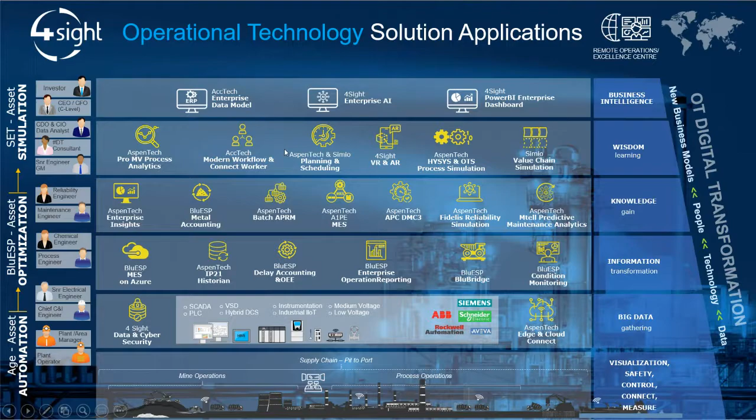So yeah, the digital twin concept is becoming quite a key theme today in what we have to do for our industrial clients. Maybe just a last word on BluESP before we start. So as I said, at BluESP we see ourselves as a very dynamic and agile company of multidisciplinary engineers. So we've got a bunch of chemical engineers, mechanical engineers, electronic engineers, and also data scientists that bring value to the client.

We really use technologies, we use AspenTech as a role model to basically understand what new intelligent technologies they bring to market, and how they bring, for example, AI, machine learning, deep learning into these disciplines of MES systems or advanced process control systems or multivariate analysis, and some of the things that we'll talk about, and you'll see a bit of that today. So we're working very, very closely with AspenTech on a lot of these things.

If you look at the offer set, we have tools in the design set here at the bottom, and really the key focus there is simulation, design, cost, and build associated with a new plant section. If I was going to build a new process of a plant right now, I want to do it the greenest, the most cost effective, and the most sustainable. And there's a whole set of tools that's basically focused on that.

And then the next thing is, once I build the plant, I want to operate that plant to its optimum point. So I want to basically transform that data, aggregate that data into a historian system, make the data available in EROs, so enterprise reporting, operational reporting, do mass balancing or metal accounting associated with that. Also use, for example, advanced process control in areas where there are very, very complex controls in plants. So those are some of the things that form part of the operate.

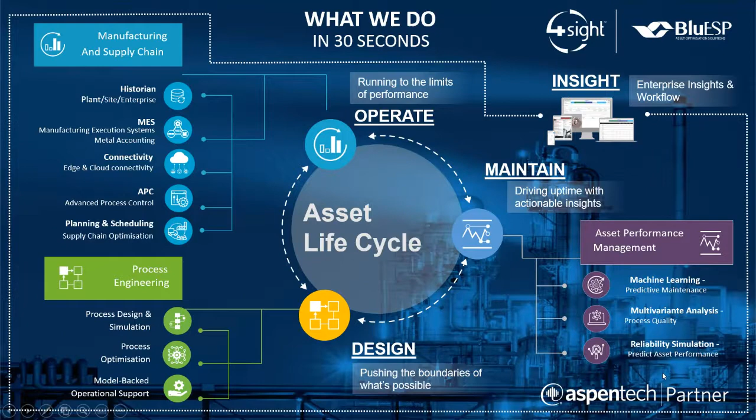We will be touching here on multivariate analysis, unlocking the potential in your plant.

To introduce us, I am Raisa Khan. I am an APM engineer at BluESP. I joined early this year and hit the ground running with predictive maintenance for a mining giant. I have previous experience in the steel industry and hold a chemical engineering degree from Stellenbosch University.

Next up, we have Laura. Laura has 20-plus years of experience in industrial maintenance and global field service across multiple industries. As a member of the AspenTech Asset Performance Management marketing team, she looks to use this background to communicate how the powerful solutions address the recurring frustrations of customers in the most value-added way. She holds a bachelor's in mechanical engineering from Virginia Tech and an MBA from Indiana University.

Next up, we have Kinesh. Kinesh holds a master's degree in mechanical engineering from the University of Pretoria, specializing in gas turbine aerodynamics. Kinesh joined the BluESP APM team in 2019 and has previous experience at Deloitte as a data analyst, as well as in the petrochemical industry as a design engineer. Since joining BluESP, Kinesh has been extensively involved in various predictive maintenance and multivariate analysis projects for the petrochemical, mining, and metals industries.

Process variability is another way to say you need process stability. So when there are efforts to create this stability, you can't control what you can't observe. And issues that creep into something like production quality may be due to things that aren't associated with quality or with your production stability, or even the item in question, because they're not currently monitored. And back to the comment earlier, uncharted territory, seeing new things. So we don't necessarily even know what we don't know yet at this point.

With technology behind ProMV, customers can quickly identify the factors that are most critical to quality or the problem in question, and give more focus and insight to the efforts for plant support or even APC engineers for that matter. This could be examined across hundreds of process variables, and ProMV online capabilities then monitor behaviors amongst the variables to tell the user, the process engineer, the operator, when quality or throughput or yield might be at risk. This could be well before the thresholds of those particular parameters are triggered, and I'll walk through an example in a little while.

The other capabilities to note are that some past ProMV customers find the ability to look for areas of opportunity within their process to see if they could make process changes to do something like, say, increase throughput. This allows the customer to push the limits of the capacity and meet demand without possibly sacrificing quality, but still increasing the amount of, say, sellable product that they get out the door. Once again, back to some of the challenges that Will mentioned earlier.

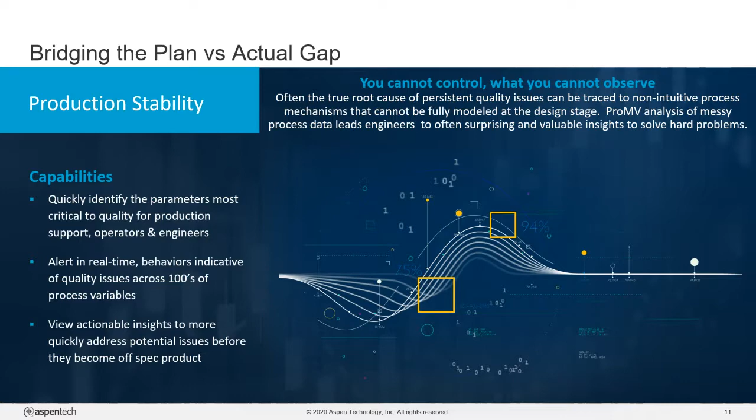One of the powerful benefits of ProMV is the ability to gain insight from process information that you've been collecting for years. Mining this information with ProMV will provide insights that aid in ensuring that process stability I mentioned earlier. The ProMV optimizer technology, which is part of the product, allows for quantitative definition of specific objectives. Then you can put variable constraints wherever needed, whatever you want to tweak, and analyze this across hundreds of process components at a time.

This puts the power in the hands of the process expert to zone in on what changes would yield the most desirable result. And some of our customers have seen pretty significant cost savings, as well as finding opportunities to tweak the processes offline and see what could happen before they run an online experiment.

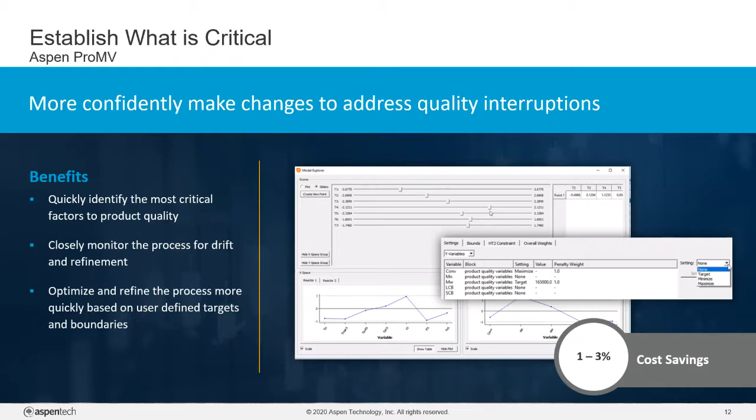Now, when you're using the online portion of ProMV, as I mentioned earlier, it monitors hundreds of different variables that could indicate potential issues. It complements other operator and quality efforts in a few different ways. Because it monitors behaviors of process parameters relative to each other, not based on thresholds of the individual parameters, say temperature or pressure, the operators gain insights on what parameters to assess as opposed to just adding more charts to their screen. They're not constantly looking and trying to make dynamic decisions based on those individual variables. The process behavior analyzed with ProMV is sometimes referred to as a soft sensor.

So it could do something like predict quality, and I'll actually walk through an example of that later. And then when it indicates, hey, the process is acting in a way that is telling me, I'm speaking as ProMV, the process is telling me that your product quality is going to be off spec, they can take action right then before it becomes off spec product. And then ProMV helps dive into what are the biggest contributors to why it's saying that. And I'll walk through that example in a second as well.

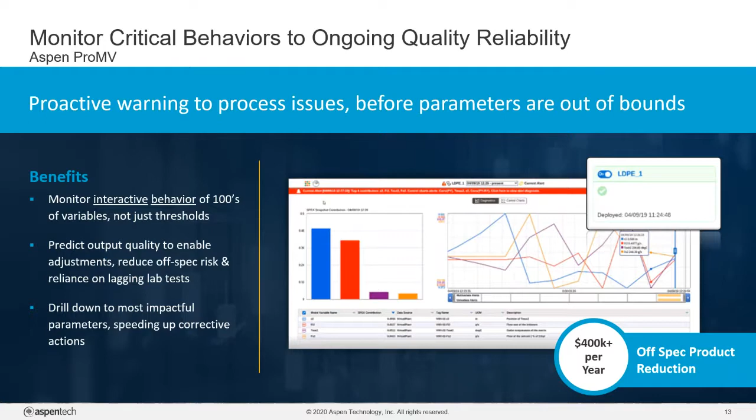And lastly, the interface, as I've just mentioned, allows them to get a quick assessment of what process parameters are most heavily contributing to what's triggering the alarm. And then just to tie it all together, I wanted to highlight that information is only useful when it provides insights. Just showing data doesn't always help draw a conclusion.

So not only is ProMV designed for, I call it messy data. That's a pretty broad term, but when you think of process data, it's passively collected. It's not always collected with a purpose in mind of being analyzed later. A lot of solutions that are out there require a significant amount of data cleanup, for example, even to be able to use, or they don't account for the fact that you go through pretty normal situations in the chemicals world of changing product grades on a regular basis. These are all things that impact the ability to effectively use an analytics solution.

But ProMV is meant for that. You see the insights that are provided on the dashboard, but also with the models that are created, you could potentially replace a significant amount of individual daily reports that are reviewed. Anything that's manually compared with human eyes, we can put the power into ProMV so that it enables consistent decisions across multiple people, or the ability to more adequately prove out a problem when discussing it amongst a group.

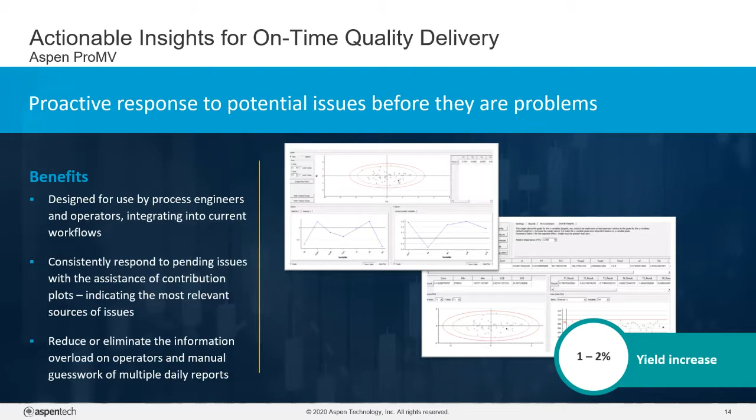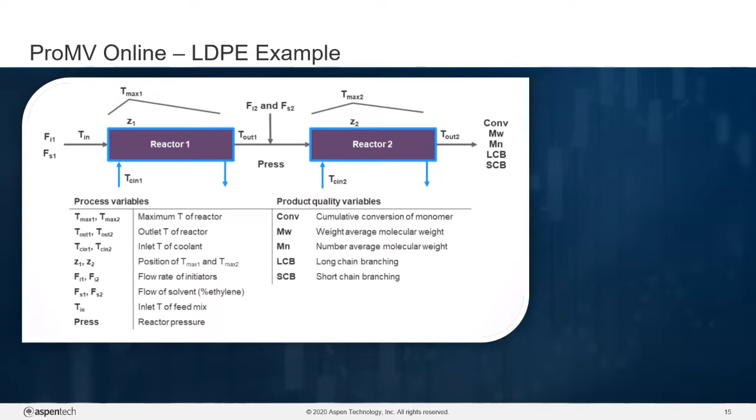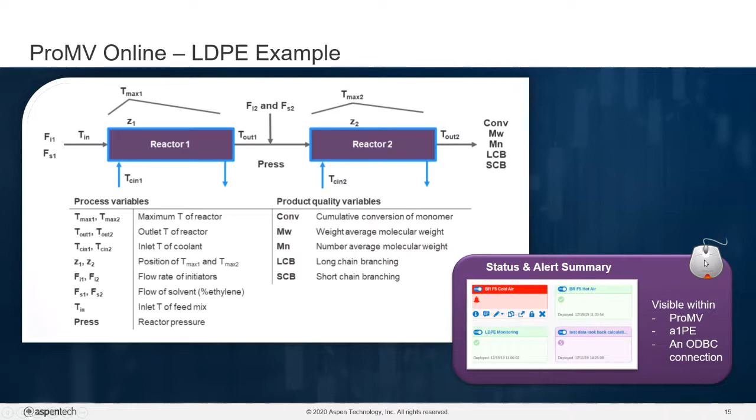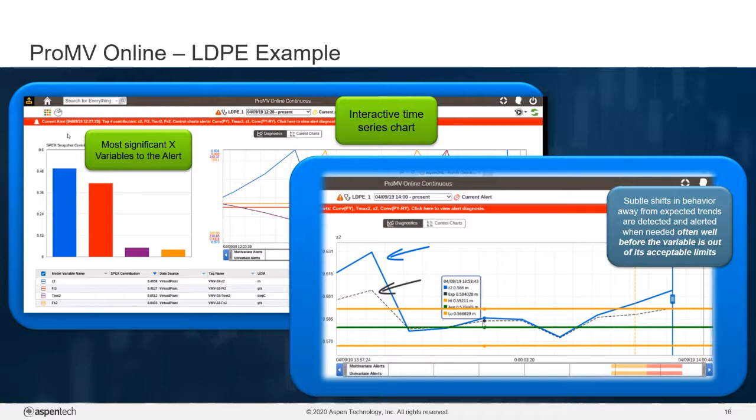Another case that I wanted to highlight, I did mention earlier, is a company called ADM. It's an agricultural products company. The particular product in this example was something that they wanted to ship more quickly. They had demand for it in the market, and so the sooner they could get it out the door, the sooner they could realize revenue and the more they could sell. But they had a problem.

Being able to ship it depended on a viscosity test that was done in a lab at the end of production. This lab test took between 2 and 3 days. So that meant 2 and 3 days of product just sitting there waiting. Then if the lab test came back that it was off spec, they couldn't ship the product. On top of that, 2 or 3 days had gone by.

So they really didn't have a good way to be able to say, okay, one, when was this product actually produced? What was going on? So what was the root cause of why it was off spec? And then on top of that, what had changed in the process since then so that they could rectify the situation? It was really putting them in a you-didn't-know-what-you-were-going-to-get kind of situation.

So using ProMV, what they did was model the process information against the output from the lab tests. Now they knew that it wasn't going to be exactly accurate because there's changes in lab procedures, testing techniques, the delay at the lab itself. But they figured they'd give it a try because one of the other things they had tried before was to add an intermediate test throughout the process, but they didn't find any kind of correlation to the final lab results. So that effort was scrapped.

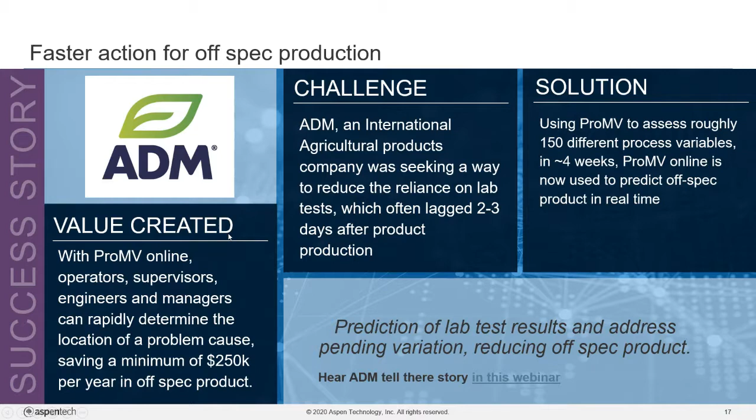So I just quickly wanted to look at some of the players that we have on site on a daily basis and the challenges that they face from a different aspect as what we've already looked at, except maybe for our directors of operation or senior VPs. They've got a different challenge apart from a day-to-day basis where they need to improve overall operations.

Industry 4.0 and digitalization promises that you are able to have better informed decisions and that you can also better predict and improve your process outcomes. Okay, but 3% of our industrial data is currently used, in studies that have been done. And a large reason for this is purely the fact that we are struggling to separate our good data, our signals data, from the noise. Now that's the promise that ProMV brings.

But like I say, there's more than just improving yield and so forth on site itself. Our senior management really have pressure to improve because there's no reason for them not to make use of the new technologies that are present today.

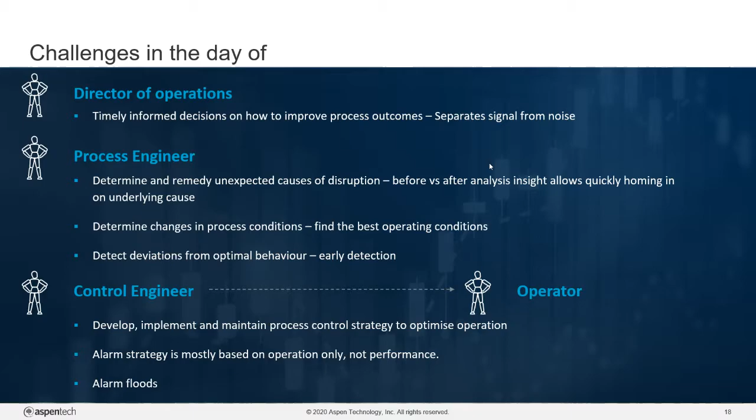Thank you, Koos. Hi, everyone. I'll take you through a practical example of how ProMV can be applied in industrial processes. Simply, ProMV is able to sit on top of your data management layer, where you can use the data that you've been recording for years and start to mine the value from that data. All of this works if you have the right amount of data, a good history of your process, and quality measurements that you can actually tie back to your process.

In this specific case study, I'll take you through how quality prediction can be done in a mining flotation plant. A mining flotation process is a continuous process used for selectively separating valuable minerals or metals from an ore pulp mixture. You can see a schematic of the flotation cell that's used. In this application, flotation plants are designed to concentrate the iron ore to maximize recovery of valuable minerals or metals. This is a common application in mining operations, but it's not limited to this industry. We also see flotation plants used in paper recycling as well as wastewater treatment.

The objective of this study is to demonstrate how we can predict the amount of impurity in the ore before the lab result is actually measured. Often lab results take time to come back. We can use ProMV to demonstrate how you can predict the quality before you reach the point where you have to make a process intervention. If the impurity content can be predicted earlier, it will provide process or chemical engineers with actionable insights to adjust the process to reach the target quality. This will help maximize the economic value of your process, reduce the amount of concentrate that gets sent to waste or disposal, and save costs in the long run.

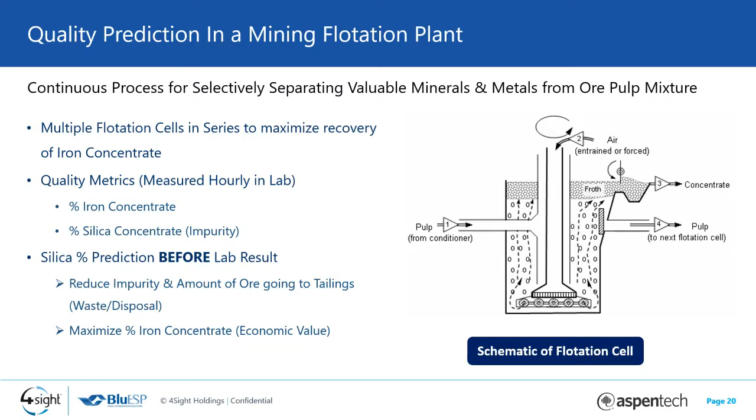So just an overview of the flotation process and the data that we have available. In this specific plant, we have a flotation process which consists of multiple flotation cells. And these are agitated with air that's been supplied through the shaft in the middle. And the ore pulp mixture is sent through various cells to maximize your recovery, as well as the additions of surfactants or wetting agents, which are added to the pulp mixture when it enters the process. And this drives your particle interaction and attachment when it's interacting with the air.

So the target particles then attach to the air bubbles and flow to the surface where they collect, and then your pulp mixture is sent through the system, through the cells, and eventually ends up in your tailings, which is your disposal.

So the data used to generate a latent variable model or a model in ProMV consists of 2 data blocks. The convention is we have an X data block, which is your input, and these consist of initial conditions. And in this specific application, we have your quality measured at the start of your process, which is the quality of iron in the feed, and the amount of silica, which is your impurity in the feed. We then also have your process variables, which are tracked over time as the process goes from start to end. And these are your addition of pulp, the flow of pulp, the density, the addition of starch and amine, as well as your flotation column measurements. And these are your flow of air as well as the level in the columns.

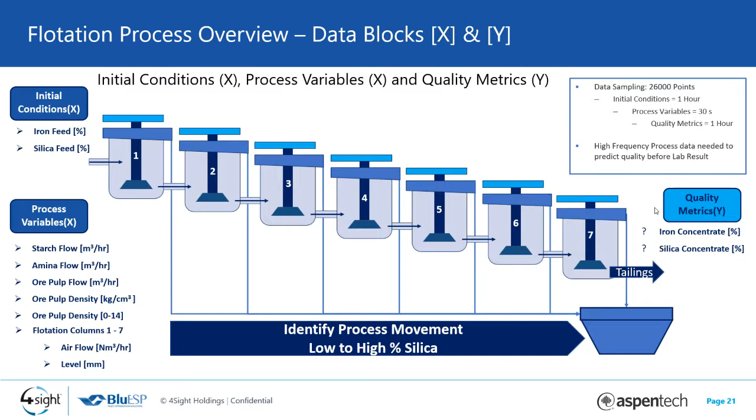And the amount of data that we used is we used a sample of 26,000 data points. And this is because we want to predict our quality before a lab result is sent back. And so in doing that, we have initial conditions, which is the feed that is measured at the start of the process. These are measured in an hourly interval, same as your quality. And then our process variables are actually tracked in 30 seconds intervals. So that will give us an indication if we can maybe predict this quality within minutes rather than hours. So ProMV actually ingests this data as data blocks, as you can see.

And if you look at the data just from a visual point of view and having a look at all of these variables, it's not really easy to see how they all interact together and what's happening at the same time, or tie it back to your quality. If you have a look on the right-hand side, there's many relationships that exist, a lot of different inputs and responses changing all the time. So how do you identify the variance in your process without a latent variable model? And this is where the power of ProMV comes into play.

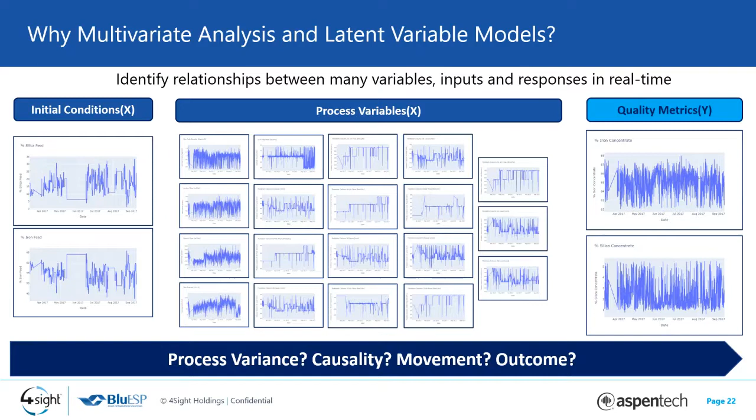ProMV is able to reduce the dimensions of your model so that you can analyze fewer variables, but still hold the vital information of your process. And latent variable models are able to translate the information between the real world and the latent variable world to make it simple to understand what's happening in your process and without a loss of information. Aspen ProMV is also the only solution in the market that can do this while looking at different operating campaigns, variation in raw material feed, your seasonal conditions, and your operator influence in a single view.

So the first step in ProMV is actually identifying the operating space and identifying all the different ways that the plant is operated in the past. The score plot is an indication of how your variables have interacted in the process over a given period of time. So in this specific example, you can see that the score plot is shown by the quality of iron in your feed that enters your process. And the colors actually indicate from low to high, from blue to red. And this also gives us an indication of how the process changes going from a raw material composition point of view.

So the model accuracy is quite suitable for a high frequency data set. We're looking at about 60% of variance that's been explained in terms of your R squared. And then we also have a similar accuracy in terms of your Q squared, which is the predictive power. So the score plot is actually displayed according to the first two latent variables, because these two latent variables or principal components explain at least 80 to 90% of your process variance. And here we can see the different clusters of iron feed indicating various starting positions of the observations that are being considered in this model.

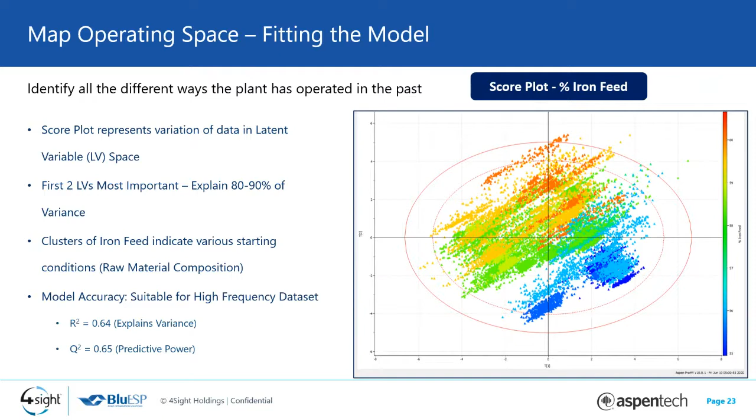Next, we can also have a look at variable correlation, understanding key relationships which exist between the variables that you're analyzing. So in ProMV, we can test our model, or actually validate our model to see do the variables and how they interact together make sense from a process point of view.

We also expect certain relationships to exist based on the laws of physics or chemistry, and that will govern the process as well. So in this particular plot, it's a loading plot which indicates the directions in which the variables move in relation to each other, either positively or negatively.

So the model here is telling us that our raw material feed, which is our quality of feed entering the process, whether it be iron or silica, is basically inversely correlated, meaning that when we have more iron entering the process, we have less silica, and vice versa. And this also holds true for our concentrate at the end of the process: we see that our iron concentrate is much higher at the end when our silica is less, meaning that we have less impurity.

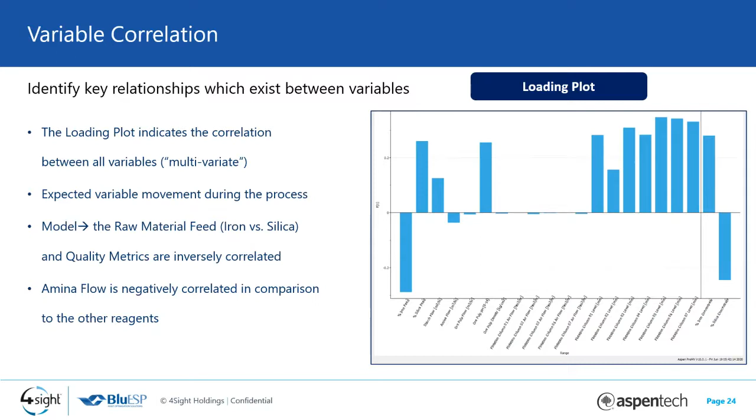So in terms of the process variables, we can also see that some of the reagent flows also interact quite differently. Specifically, the amina flow is negatively correlated with the others. So the next step is now to understand how do we stabilize the process or identify the variance, and how do we reduce the likelihood of that variance occurring.

So to stabilize the process, we can look at the operating space and look at the observations where the impurity levels were lower, and then at the observations where the impurity levels were much higher. And then we can actually look at the contributions to that movement. What drove the process from a low impurity to a high impurity?

And the contribution plot will then explain which variables caused this driving force, and will also give us an indication of how we can overcome this driving force. So this can be done for any variable that you have in your model. You can view the score plot according to your X variables, the inputs, and your Y variables, depending on the objective that you're trying to achieve.

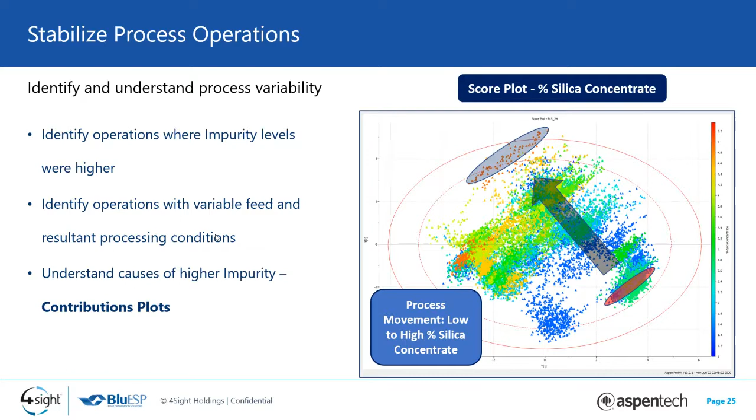So now that we have mapped the operating space, we can see that the contribution from a low impurity level to a high impurity level is shown on the right-hand side. And these variables are displayed as weights, indicating their magnitude and direction in the process movement. So the variables that are below the x-axis were seen to be much lower when the process had high impurity levels, and the variables above the x-axis were seen to be much higher when the process had high impurity levels.

So in order to achieve a lower impurity concentrate, this graph is actually telling us that we need to increase the variables that are below the x-axis, which is your reagent flows, your ore pulp pH, as well as the density, the starch flow, and the silica feed, for example. But on the other hand, we need to also decrease the amount of iron that's entering the process.

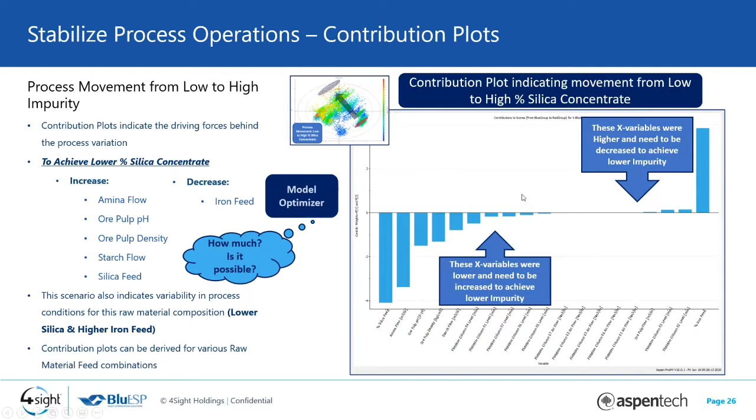But how much of this is possible, and is it physically possible? And that's where the model optimizer comes into play. So the model optimizer will actually tell us how much of this we can control and give a quantitative value of how we should control the process.

So the model optimizer is a unique offering in Aspen ProMV because it allows the user to identify optimal set points which you could input to your plant and test against your model to see if you achieve the targeted outcome. And this is based on a PLS model, a partial least squares model. So the model is able to predict your Y variables from your X variables, but it's also able to predict X variables from the model.

And in this particular case, the goal of the optimization was to minimize the impurity and also take into account the variable boundaries that exist in the model already, so setting the lower and upper bounds to the minimum and maximum of the model. And this will also allow you to set safety limits to your process, known values to variables that you are able to control, as well as different raw material feeds if you want to test against different initial conditions to see how your process is affected by raw materials.

And then you can set targets to your quality. So in this particular case, we look to minimize the impurity, but in doing so, we're also maximizing the amount of iron concentrate that will result.

So as you can see there, this optimization ran and it actually gave us a list of all the X variables and a quantitative value of what we can use in the plant to achieve this quality. So the feature not only tells you how to change the process, but also provides a quantitative value as input to your operations.

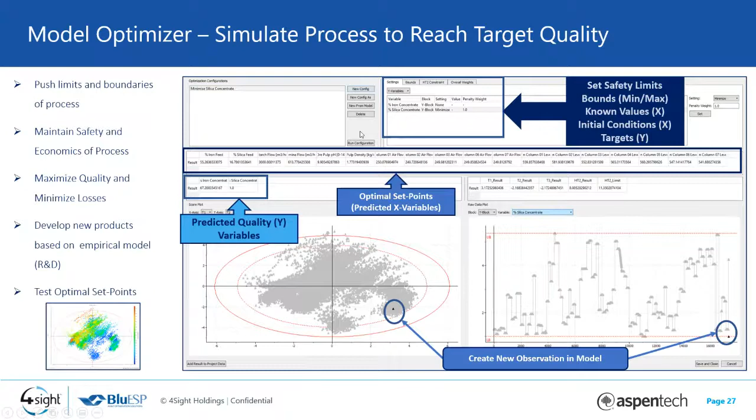So in real time, these models can be deployed and monitor your process continuously and give you prescriptive and real-time guidance on how to correct the process if it starts to move out of the boundaries of where you want to achieve the best quality or yield.

So to conclude, this exercise or case study was actually analyzed in 3 to 4 hours, and that's less than a day. And this includes preparing the data, aggregating the data according to the structure that you need to predict, as well as analyzing all of these plots in ProMV. So the benefit here is that it helps the end user to analyze large volumes of data quite quickly, and it also adds to the domain expertise of the users.